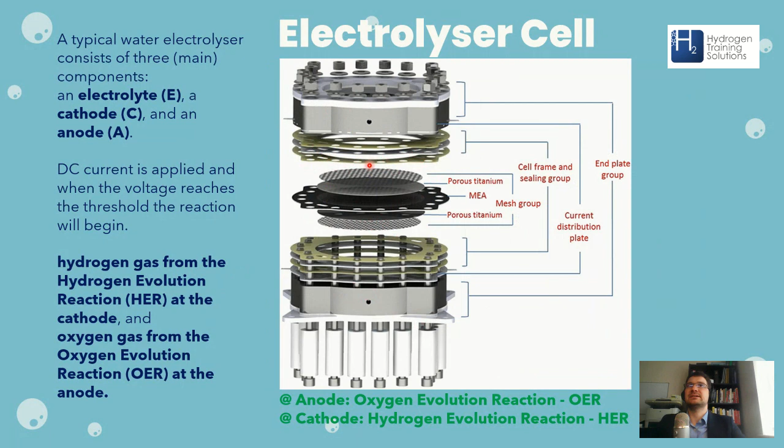And then you have here the cell, whatever you want to call these. You can call these cell plates. You can call this the sealant. And normally there's some sort of a gasket in between them as well, although not in all systems.

And so I'd like to show you what actually happens in the cell. So you have water go into the cell, and if you want to imagine this, this is going to be one cell, and the water is going to go in here. This is going to be the anode chamber. This is going to be the cathode chamber. You've got the PEM membrane, and a lot of people ask, PEM, what does that stand for?

It stands for two things: polymer electrolyte membrane, and PEM also happens to be the acronym for something else, which is the proton exchange membrane. And they're essentially talking about the same thing, this green labeled membrane here. But the only difference is that the polymer electrolyte membrane definition tells you what material it's made out of, and that it's actually an electrolyte.

What the proton exchange membrane tells you is that it actually conducts protons. It allows the protons to go through, whereas in the traditional electrical sense, this PEM membrane is actually an insulator because it doesn't allow electrons to go through, but it does allow protons to go through. So it does exchange protons.

So here's what happens. And I'm just trying to keep an eye on my time here. So you have the water go into the anode chamber, and let's just talk about electrolysis here. So the water actually goes through the gas diffusion layer. So these two layers do the gas diffusion. The water goes onto the surface of the membrane, and when you switch on your PSU, you are going to apply a positive onto the anode side, and a negative to the cathode side of the membrane. And the reaction is going to happen.

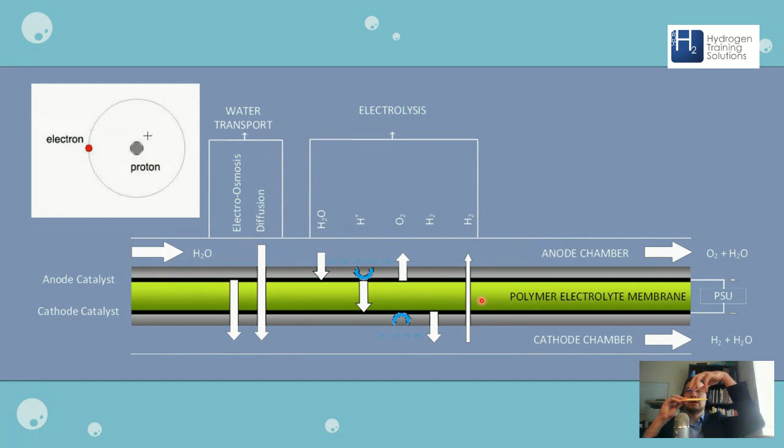You can almost imagine the PEM membrane to be a sponge. When you put water on one side, the sponge will soak and the water will come out on the other side. That's how I'd imagine the PEM membrane. So when you apply water on one side of the sponge, you eventually are going to have water coming out on the other side. This happens regardless of generation, whenever your main circulation pump is running.

There is one last arrow here which I'd like to talk about, and this is hydrogen going back into the anode chamber. There is going to be a pressure gradient. The cathode side, the hydrogen side, is going to be pressurized to around 30 or 35 bars on most modern industry standard PEM electrolyzers, and the anode chamber is going to be very close to atmospheric.

Because of this pressure gradient, the hydrogen will want to go back. It's pretty normal, and it's just normal operation. The way the PEM membrane works is that it will allow some hydrogen back, and this flow of hydrogen back depends on the magnitude of the pressure gradient. The bigger the pressure difference, the higher the transport of hydrogen back.

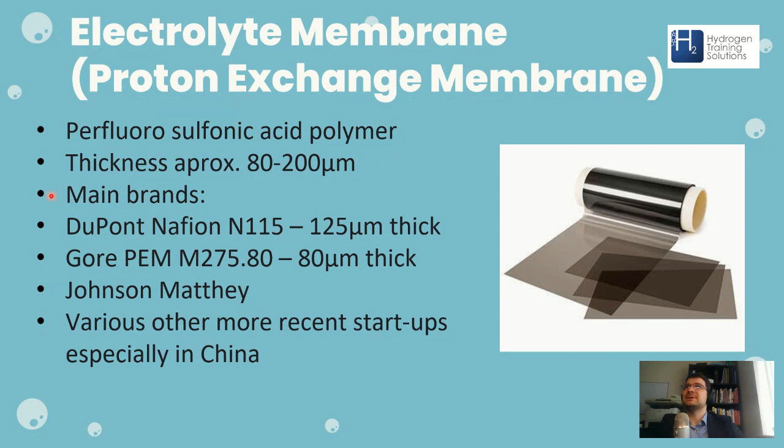So on to the MEA. A lot of people are asking, what is the MEA? What is the membrane electrode assembly? So here's the thing. A lot of people refer to the MEA as different things. I've spoken to people from Canada, from the US, from Germany, from all over the world, and a lot of people tend to have a different idea of what the MEA is. But most people would agree that the MEA is the PEM membrane, and it also includes the anode and cathode catalyst. So it's basically the PEM membrane with the anode and cathode catalyst loadings on both sides.

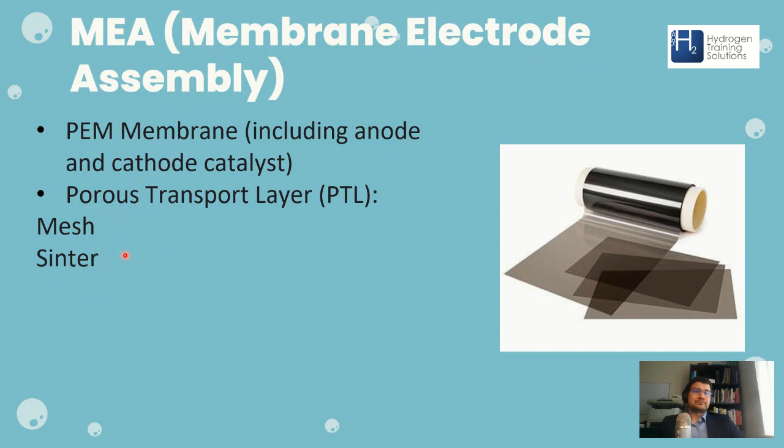That is what most people are going to refer to, but some other people you might hear referring to the MEA actually mean the PEM membrane with catalyst on both sides, plus the porous transport layer. Essentially, what they're referring to is pretty much an entire cell. So just as a way of information, if you hear membrane electrode assembly, MEA, it doesn't really have a specific definition. So for stacks, the next thing I'd like to talk about is degradation mechanisms.

This is quite important. It's quite a hot topic these days, the degradation mechanisms for stacks. Why are stacks failing? Why do they keep failing more often than a lot of people hope? Essentially, you can attribute it to about three things. One of them is membrane thinning, which is caused by hotspot formation. The other one is the catalyst loading, and number three is the increase in voltage for end of life, and the end of life voltage being reached before end of life should come. So let's talk about these one by one.

So low water flow. This is very difficult because when you're designing a stack with 100 cells, or a stack of 50, 60, 70, 80, 90 cells or even more, you run into a mass transport issue. Are you actually able to pump all of the water that stack needs with the pumps that you have and the pumps that are available, or not, essentially.

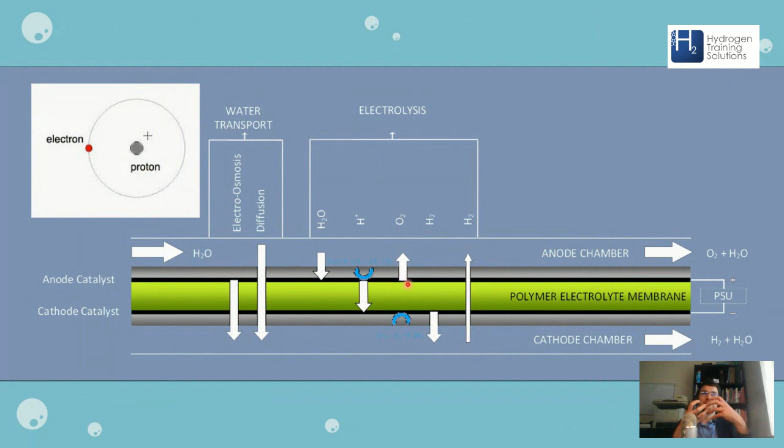If you don't have enough water flow in a stack, what you'll have is hotspot formation, and these are literally hotspots. These are areas of your membrane where, if I go back quickly to my membrane diagram here, on the oxygen side, let's say this is the surface of the membrane, you're going to have oxygen bubbles forming. These bubbles form faster if you increase the current density. So when you crank up the current density, these bubbles are forming. Are you able to have sufficient water flow to wash these oxygen bubbles away from the anode chamber?

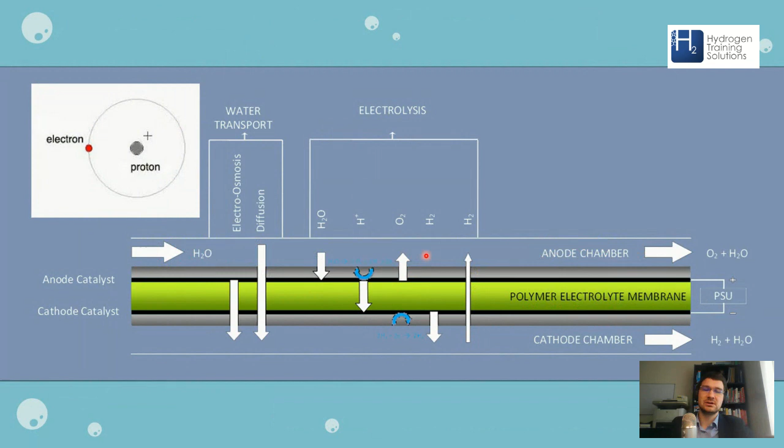Because if you don't, you're going to have extra hotspot formation, and in these particular areas where you have oxygen, electrolysis is just not going to happen. There won't be any electrolysis whatsoever. It's not that the efficiency will go down; there just won't be any electrolysis on those spots. But what there will be is frying of the membrane for a split second. And if you keep on frying it for split seconds over and over again, eventually you are going to achieve membrane thinning.

This is terrible. When you have membrane thinning, you are basically frying bits and parts of your membrane. Eventually you'll have tiny holes in the membrane, and you are going to increase your crossover rate. So, like we said before, because of the pressure gradient, you'll have more hydrogen coming back into the anode chamber, which can lead to explosions.

And the second is also relatively similar. So if you design stacks which prevent water flow from actually reaching the membrane easily. So if, for example, your porous transport layer is way too thick, or not very porous, if your porous transport layer isn't as porous as it should be, then the water isn't able to wash away those oxygen molecules.

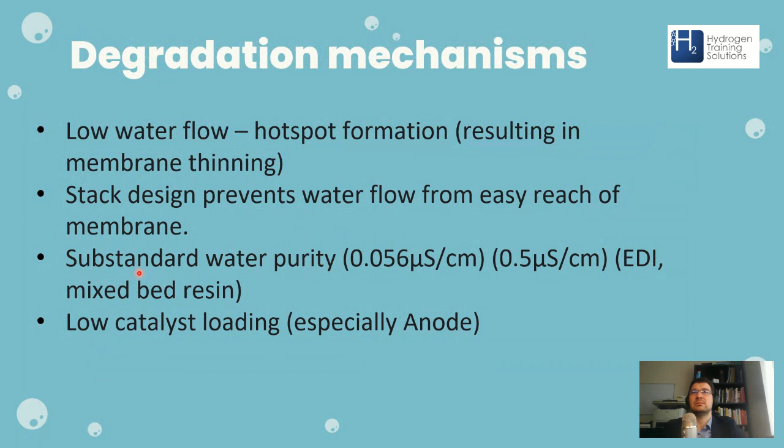And this developing of this inefficiency that you are going to see at older stack designs, if you have a look, is going to be reduced if you are passing high quality, very low conductivity water through the stack, and you're electrolyzing with water that's very pure.

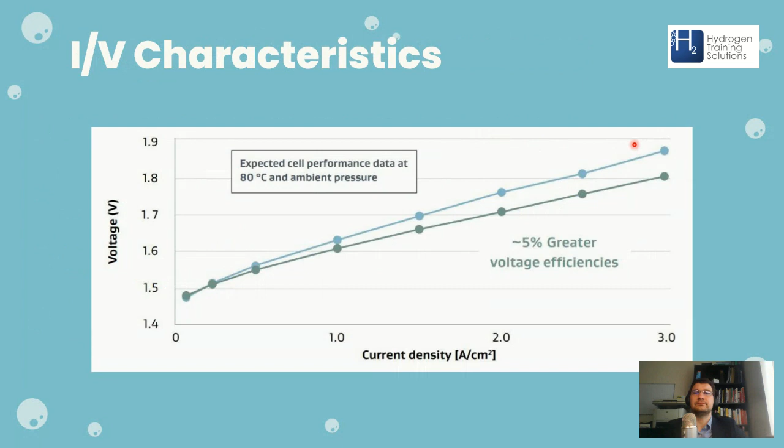Okay, so just a couple of things on efficiencies. It normally takes about 55 kilowatt hours of electricity to produce 1 kilogram of hydrogen, and it's very common to have a 10% balance of plant on top of that on large scale electrolyzers, and 1 ton of hydrogen is then of course going to mean that it takes around 60,000 kilowatt hours to generate 1 ton of hydrogen with a PEM electrolyzer. And like I said, as we're reaching end of life, this output is going to reduce because the efficiency is reducing, the voltage efficiency is reducing.

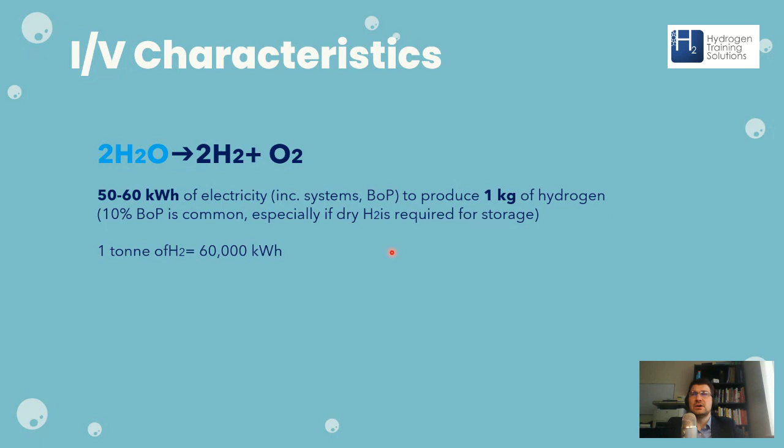So, when we talk about degradation mechanisms, there is a company called Weidmuller who has a great device which essentially is a probe for a lot of the cells within your stack, and it runs a lot of measurement and finds a lot of data of the stack. When you have a stack failure, for example, you're actually going to have way more data, because this Weidmuller system is able to tell you the voltage across each of the cells, and from that you can just get a multitude of data. You can get a ridiculous amount of data.

There's also a lot of research going into getting this system ready to also tell you which cell has failed. If you have a stack failure, it will tell you which cell has actually failed. So you don't have to take the whole stack apart. You can just dig down to that particular cell and fix that particular cell. The stacks are extremely expensive, both to build, but they're also really expensive even to rebuild when you have a stack failure.

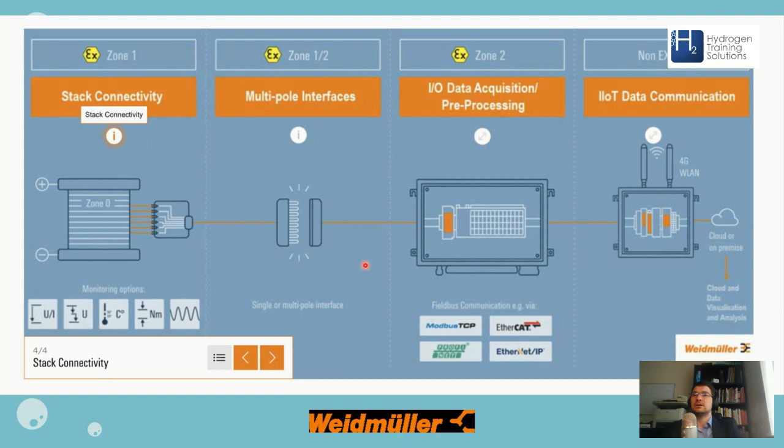So oxygen management. And this is really interesting. When you're generating hydrogen, you're also generating oxygen, and I'm talking about the anode side right now. So on the anode side, you're going to generate quite a lot of oxygen. And if you look at this diagram down here on the right, let's say you have a 1 megawatt stack and you're running 1,000 liters of water across your 1 megawatt stack. Well, this 100% is 1,000 liters. Out of that, when you're running the stack at 3 amps per square centimeter, you're going to lose about 0.2%

of the water. Because, by the way, a lot of people think that the water you're running into the stack is going to get all used up and it's all turned into hydrogen and oxygen. No, no. You're running that water through the stack, and a small amount of that water is going to turn into hydrogen and oxygen. But most of the water is just running through the stack and is used for washing away all the chemicals and also to cool down the stack, because especially on the anode side there's a lot of inefficiencies, which are going to cause heating, and the water is used to transport the heat away from the cell so as to not damage the membrane.

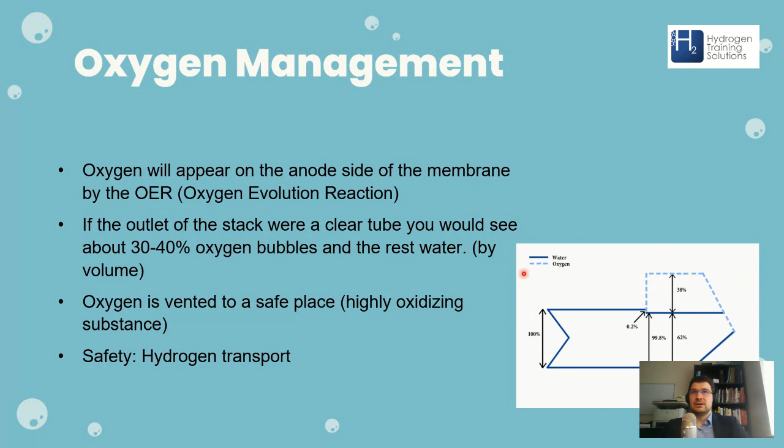And we're going to jump over to these last couple of slides, and to sum it up, we can achieve great efficiency. However, you're going to sacrifice a few things. So if you achieve your great efficiency, you're going to sacrifice your capex or your opex. And also, if you're going to have massive durability, you'll use thicker membranes, you're going to increase your catalyst loading, etc. Yeah, that's going to be quite expensive.

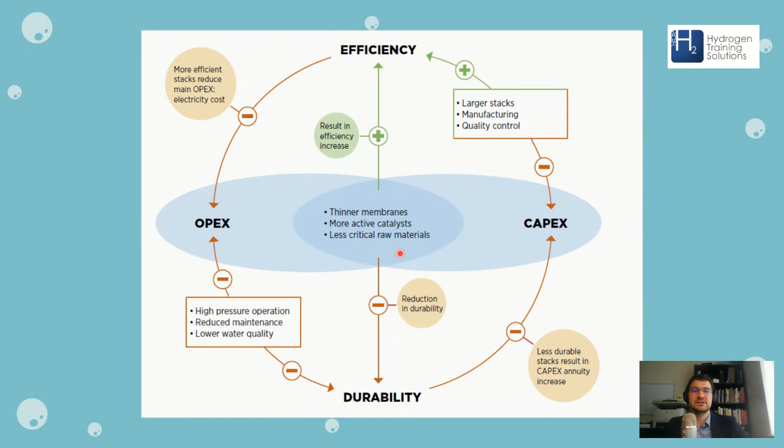On the catalyst side today, it's very difficult to reduce the catalyst loading. Iridium is insanely expensive, more than 3 times the cost of gold per kilogram. There's a lot of organizations looking into an improved catalyst which doesn't cost as much and has the same durability. Ruthenium, for example, is interesting because it's actually an even better catalyst than iridium, it's cheaper and more reactive, and you can make more efficient stacks. However, it can't really last very long in that highly oxidizing environment. Hence, we use iridium.